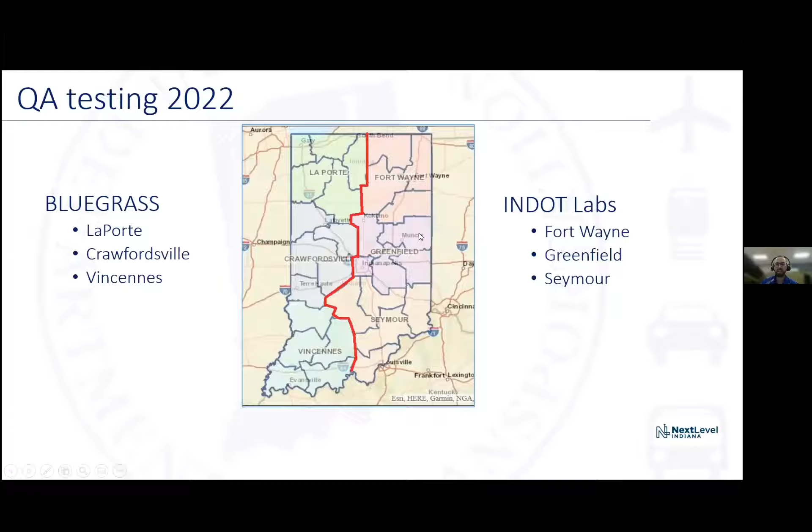So we decided to make a straight line right through the middle. We have Bluegrass doing the left portion of the state, which is LaPorte, Crawfordsville, and Vincennes. And our OMM INDOT Acceptance Center is going to be doing the right side, which includes Fort Wayne, Greenfield, and Seymour. So hopefully you guys have been aware of this by now.

M&T website. So this is just kind of a refresher of things you guys should know or be aware of. We changed our approved products and sources list to qualified products and sources. It's all still the same approval list, just a different title, but those are all on the website. We have our HMA design labs, our ready concrete plants, all our ITMs, and those update pretty frequently. So it's always good to know where those are at and make sure you're looking at the current one.

We also have testing memos, our certified list. This includes CAP, field supervisor, and ICAT. I would say it doesn't hurt to go in here and look at it every now and then to make sure you're actually proficient and make sure everything is updated on this list. And if not, you could always email me or Krista and we could update this list with your appropriate qualifications.

We have our GSB list, which a lot of you guys should be using already with your new DMS for 2022. And we have our data views, which I will talk about a little later. So overview, things we're going to be talking about today include specification updates, our various HMA programs that have been released in the last couple of years, and some of our initiatives like our pilot projects, VRAM, spray paver, etc.

First things first, spec updates. We got our RSPs. These are recurring special provisions, which would be implemented into the 2024 spec book. So the main update we had this year was in 401 R736. So we decided to put in the spec to use RPE as an alternative for joint sealant instead of SS-1h or AE-NT. And in the table, you can see the application rate's a little different.

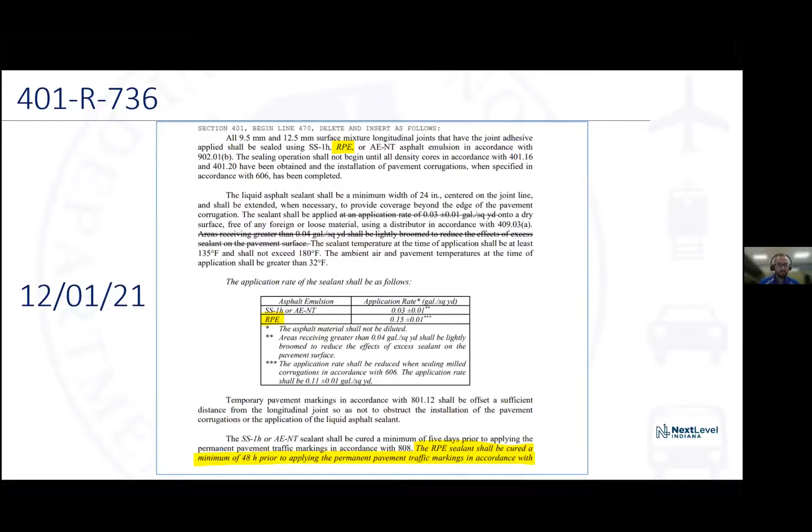Another update we have is about patching material. There's some situations kind of at the end of the year where you might not have hot mix and you just took a core and you need to fill that core hole. So we have a QPL, a qualified products list for rapid setting patch material. And if you go on there, there's a subsection called bridge deck repair material. And there's a list of various concrete materials that can be used to fill up those core holes. You can use anything on that list.

Various states around us, such as Illinois, and I think Kentucky, have been using cold concrete patch materials for core holes, and they haven't had any issues with it. So we decided to go ahead and start doing that too. And this applies for contracts that let after 6/1/2022.

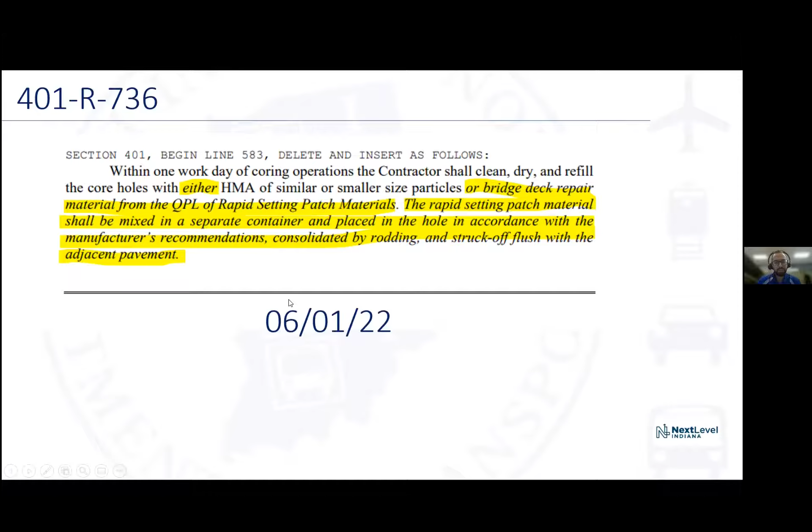ITM updates, like I said, these are all online. They're always good to look at. They update various times throughout the year. There's 4 main ones that we updated. First off was ITM 571. We added the auto extractor as a method for extractions. I think we have about 3 or 4 producers that actually have these machines, so we do that in there for them. ITM 583, which is our certified HMA producer program.

We put a little minor update for binder adjustments for SMA, for JMFs. ITM 587, reducing sample size. We put more guidance on our quartering sample method, which we use for splitting the samples. And ITM 902 for sieve verification, which Matt discussed earlier, just updated the tables below.

So ITM 571, INDOT will be using the auto extractors for 2022. And here's what it looks like in the ITM. It says there's 6 washes and 6 dries for HMA, and SMA uses 8. And we're always going to have the same number of wash as the dry cycles.

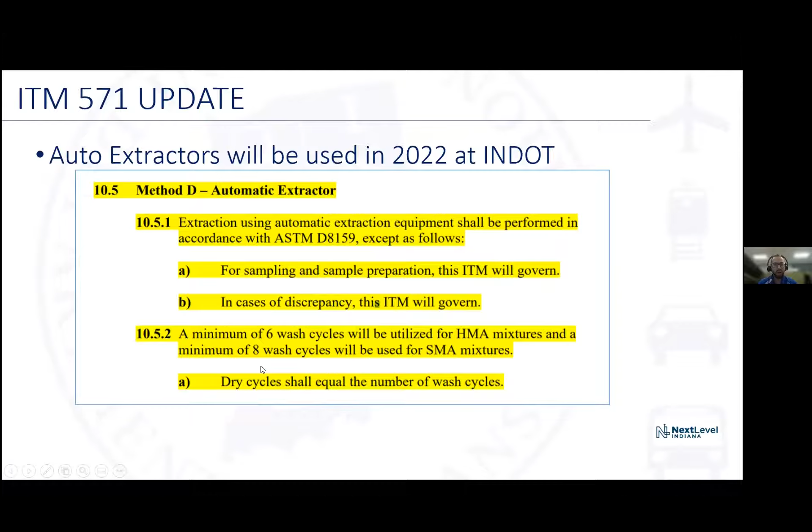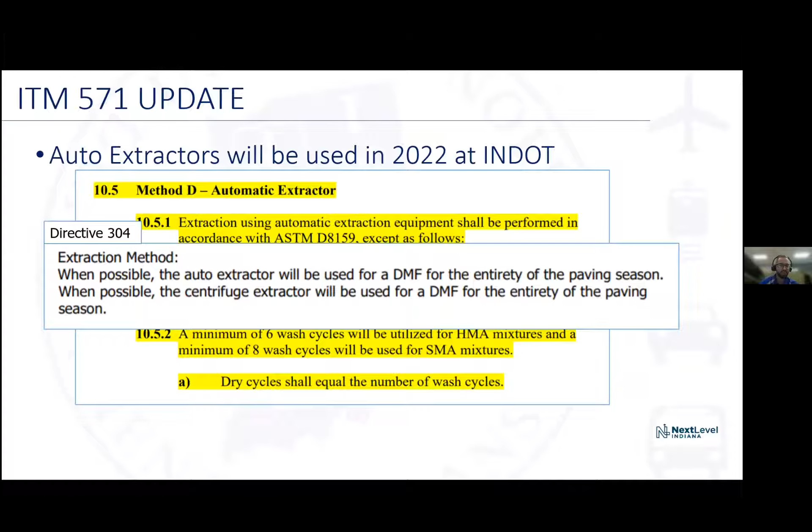But we put this little blurb in Directive 304 saying that whatever method we use for extraction on a DMF will be used throughout the paving season. So we will not be switching between auto extractors and centrifuges. We will use auto extractors for everything in 2022, at least for INDOT.

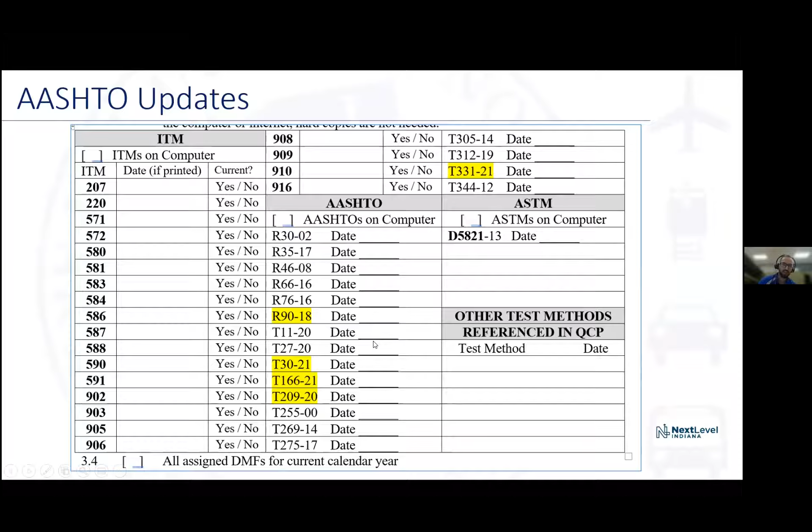AASHTO updates. This is directly out of our HMA audit packet. I kind of highlighted some of the ones that recently changed just to let you guys know for your audits coming up this season, so you have the updated versions. And it's most of the main AASHTOs for asphalt that changed: your gradations, your bulks, your max, your CoreLok. So go ahead and look at those, make sure you got the updated version before the audits and you're aware of the changes that were made.

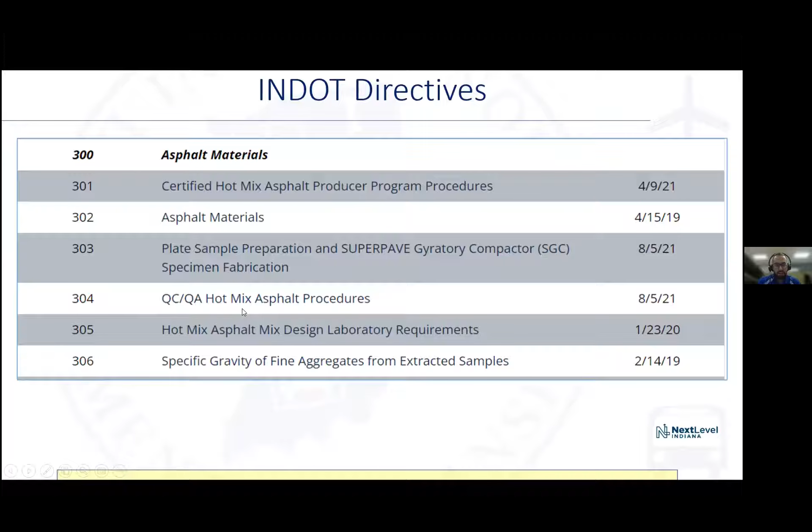Directives, these are also on the website. I showed you Directive 304 earlier. These are internal procedures developed by INDOT. And I think HMA has about 6 of them. And here's those 6. Main one, like I said, is 304 QC/QA hot mix asphalt procedures. And we also did update something else in there, which I'll show right here.

Directive 304, we updated your gyratory specimens. So occasionally you'll make your pills. One pill will be more than 0.02 different from the other pill. Normally we would rerun the sample and see what the values are. Now we're saying that we have this A3 box, and if it's not being used for GSB testing or for an appeal sample, that we could use that sample to make new pills.

Doesn't happen that often though. I think last year we had maybe 12 pills that were more than 0.02 apart. So it's nothing to really worry about, but it's just another alternative we can use to make sure that those pill values are correct.

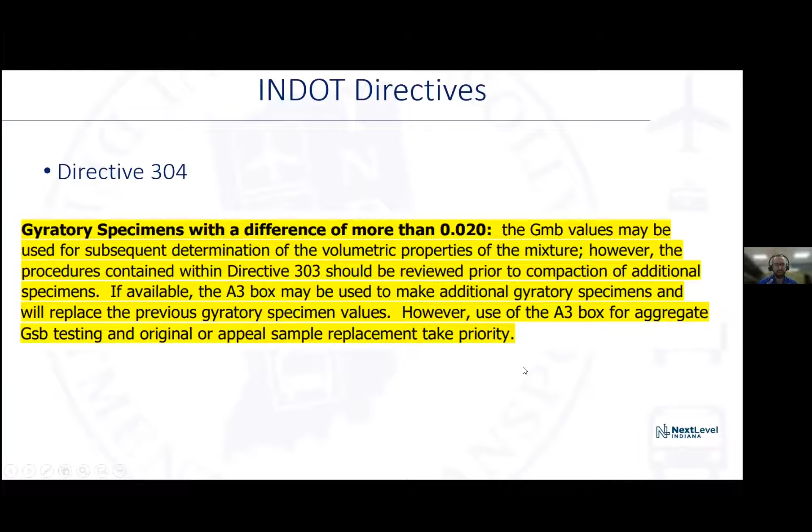So modernizing workflow, this is all about our new programs, our cloud-based systems. We have our DMF entry, we have field assistant, lab testing, and HMA Pay Wizard. So DMF entry is used by you guys, the HMA producers, and our district testing, so INDOT. Lab testing is used by our testing facilities, Bluegrass and INDOT testing labs. This is where they put the data in before it goes into Pay Wizard. Field assistant and site manager are all used by our construction folks. And Pay Wizard, again, producers and all INDOT people.

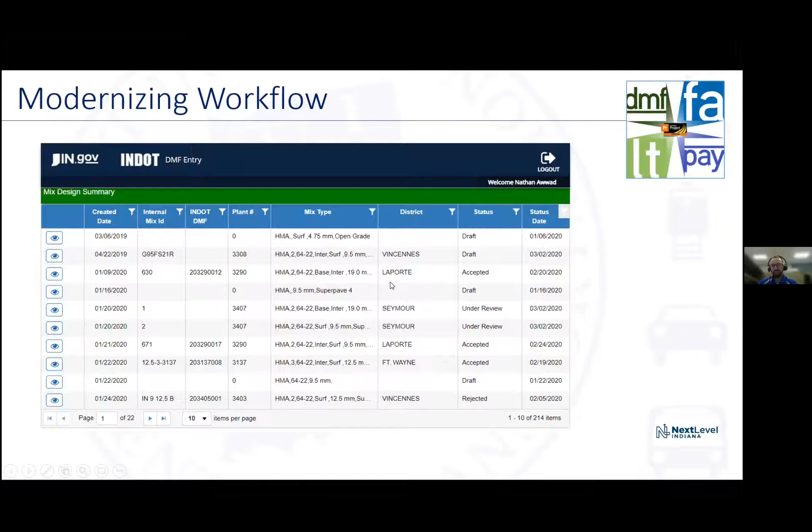So this was a picture of our DMFs. This is just an overview screen. It shows you when it's created. You can see the status of it, whether it's accepted, approved, the type of mix, district. This did just change a little with the new DMF entry update on Saturday. So it might look a little different, but it's generally the same thing. This is the actual DMF. You got your aggregates, your GSB values, binder, etc.

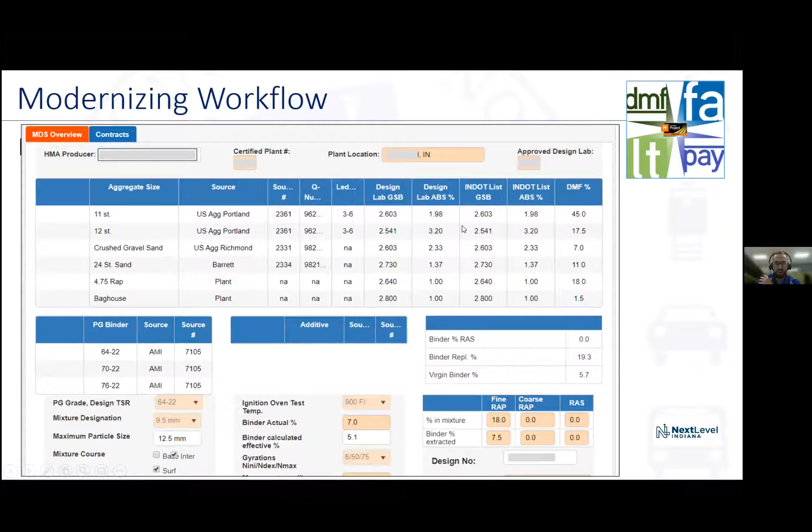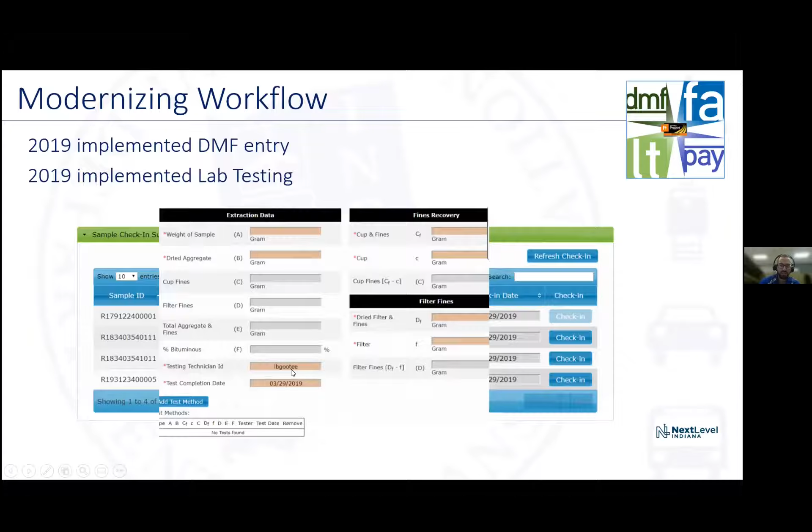So DMF entry was implemented in 2019 along with the lab testing. This is a picture of lab testing. This is their check-in screen. They could see the R number, where the district is, and the DMF number, and they check it in showing that we have the sample in our lab to start testing, just to show ownership of the sample. And then this is a picture of the extraction tab. So they would see this and they'd fill out all these reddish color cells, and everything else will auto calculate.

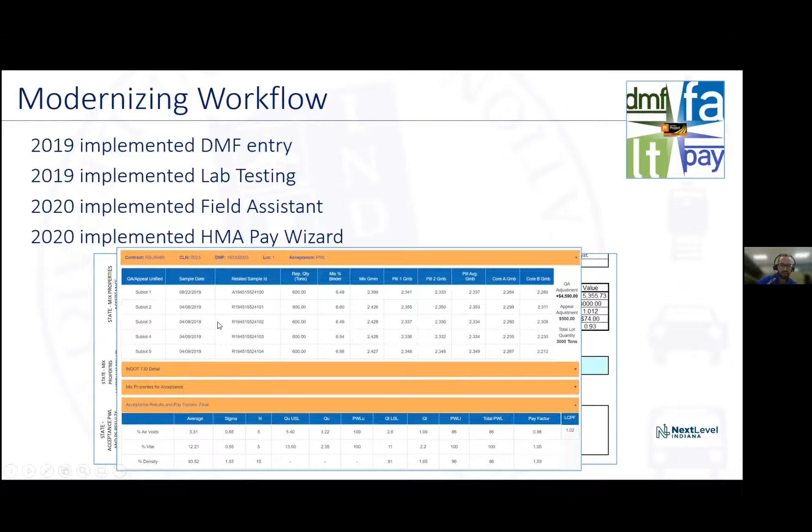And we also did Pay Wizard. So we had these Excel spreadsheets, and they were kind of clunky sending the data back and forth, and it wasn't fast or real time. So we decided to do Pay Wizard. So most of you guys have seen this by now. It shows you all your sublots, and then further below you can see your pay factors.

So DMF entry was only for HMA and open graded, but like I said, there was just an update, which I'll talk about in a minute right here. So this update just went live on Saturday. So I'm pretty sure most of you guys have seen it by now. If not, I'd go in there and definitely look at it. Now, one of the big updates is it'll accept SMA. This includes JMFs and DMFs. And it's also going to act as a filing cabinet for various mix types, all our recycling, FDR, CIR, CCPR, and you can even assign them to contracts in DMF entry.

I will say this system just came out Saturday, and the team did a lot of testing, but there's still always bugs you see after it's been released. There's just certain things you don't think to check, or just something happens that you're not aware of. So if you see any issues, contact CM support at indot.in.gov, and then contact me and Nathan, or copy us in that email, so we could see the solutions to the problems, because everyone else is going to be seeing the same issue, and we'll have the same problems to resolve.

So a couple of issues that they had were like the print view. I think last time with DMF entry, you had to go to the browser to print. Now there's like a menu button on the left, 3 lines, you would hit that and then hit print, and then it'll print your whole DMF on one screen. And another issue that we had is about RAS. If you put 0% RAS, it's saying that it's outside the spec limit, which isn't possible. But I know Kenny just released an update last night, and I'm not sure if that was part of the things that got fixed. But like I said, if there's issues, just let us know and we'll get those fixed right away, because you're not the only one having these issues.

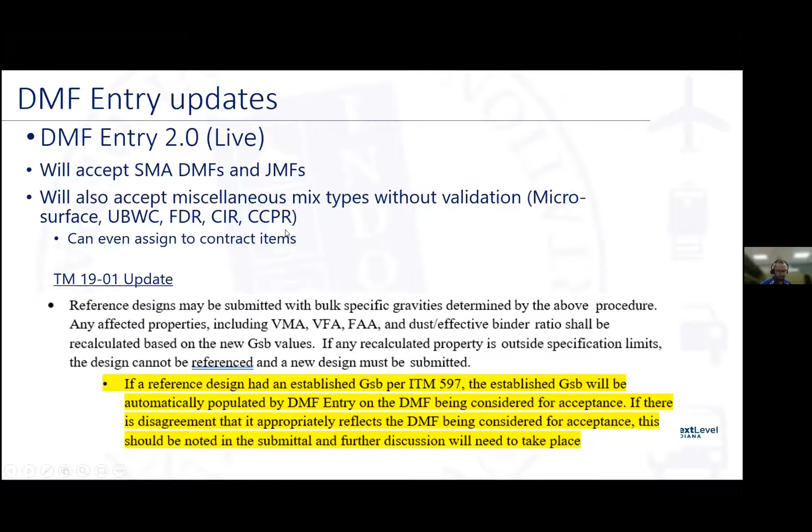So another update we have is testing memo 1901. So pretty much this is saying if you had a GSB change in 2021, I sent you an email saying it changed, and that DMF value you used last year will carry over into the new DMF this upcoming season. And now with DMF entry, the whole GSB thing is all automatic. So you won't get any emails or notifications from me. You'll get notifications in ITAP saying your GSB's changed, and you'll be able to see all your test results on DMF entry or Pay Wizard. So don't worry about my emails, but you can always contact me if you want to verify the GSB, etc. But you should be able to see that.

So Pay Wizard updates, this is a feature enhancement 2023. We're still trying to work on improving our systems. So by 2023, we're hoping to have open grade and SMA in there. And then we can finally get rid of all our acceptance lab workbooks, the Excel sheets.

R numbers. The last couple of years, we've been saying these are super important. You need these to enter your QC data. If you don't have your R numbers right away, contact the districts or contact someone from materials and tests, and we could get you those R numbers.

And then some things to let us know: if you have a contract that needs to be rolled back, especially at the end of the season. Maybe it was supposed to be PWL, needs to go to volumetric, let us know. We could easily switch those. Or if something's stuck, and by stuck, I mean, say you have a PWL contract with 5 sublots, but you're not seeing your pay factors. That is something that we could easily fix. We just have to go in the system, but if we don't know about it, we can't fix it.

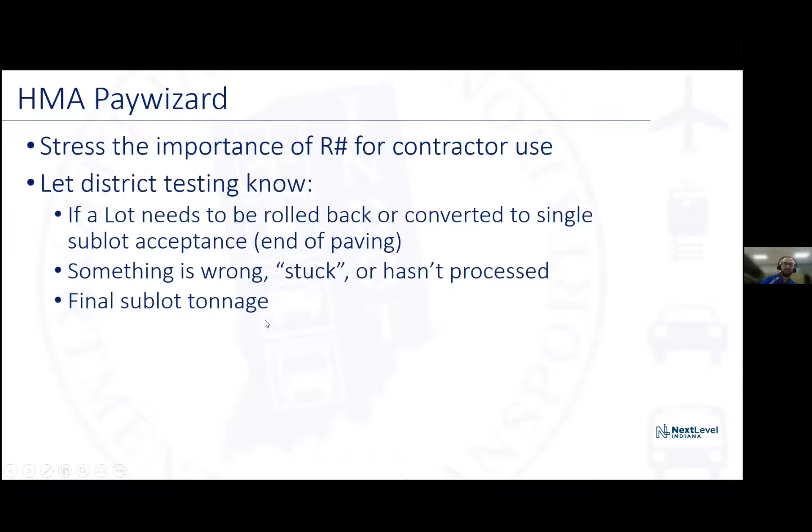Final tonnages, that's another thing at the end of the season. It usually shows 600 or 1,000, but we know that's not right. So when you get those final numbers, let the districts know so they could get those updated.

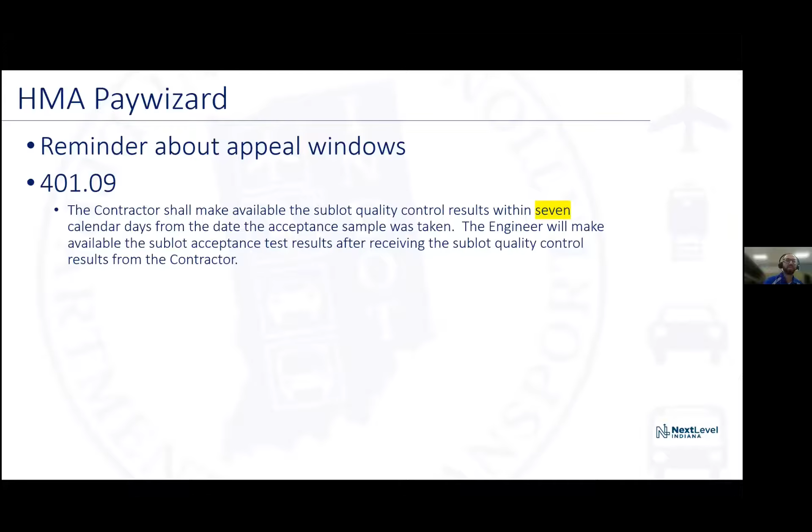Appeal windows. So we've had this in the spec for a while, 401.09, saying that there's 7 days to put the QC data into, I guess now, Pay Wizard. This is important because we have this tool now to copy QA to QC. And what that means is if INDOT has test results and it's not getting put into Pay Wizard because there's no QC data, we could go in the system and use our data for QC, which will avoid your appeal out. So here's just a couple examples.

These are from 211. They're way past 7 days. So we would go in here and copy our results to QC just to get those results to display. We don't want to take months or weeks to go through the whole appeal process and have test results just sitting there where no one can see them. So we need to make sure we're meeting our 7-day time window.

So the real benefits, like I said, of all these systems is just data. It's real time stuff that we never had access to. We're not waiting around for emails for test results. It's all there. And like I said earlier, we had some data views on our website. The only one we have right now is our pay factors and comparisons. So if you click on that, you'll see this. The first screen is your pay factors.

You can see by PWL, volumetric. You can see the sample year. It should go back to, I think, 2019, 2020. You can see each pay factor if you want. You can see what air voids looks like for volumetric contracts only. And then it'll break it down here by district. And it'll show you the average pay factor and how many samples they had. And I will say there's a date over here. I think that we found out sometimes this data is like a week or 2 behind. So just keep an eye on that too.

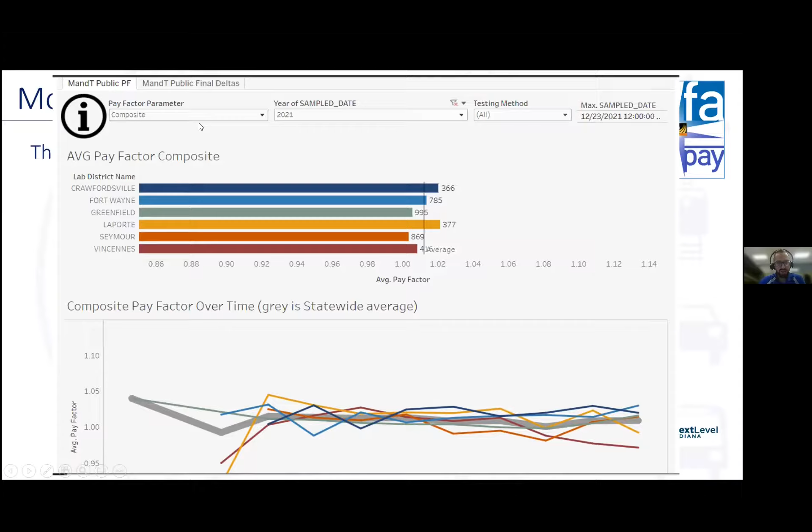And there's also a line graph to see by month. So like at this yellow line here, you'll see there's a big drop down because it's probably in March and there's only 1 sample. So you've got to keep in mind the number of samples for that particular month too. And then we have our Delta screen. It looks exactly like this, but it's just obviously comparing your QC and QA results, which a lot of people like to see.

Densities, we always like to show densities over the last 5 years to see how it was before when we had S4 and how it is now, how it's improved with S5. And last season we got an average of 94.75% density. So that's what we like to see.

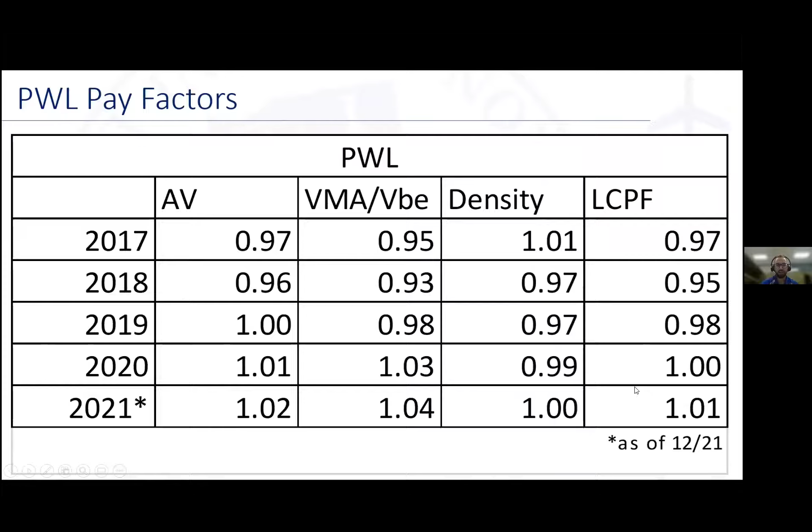Pay factors. Again, we like to show the last 5 years. 2021, this was as of December. We were averaging 1.01 for lot composite pay factor statewide for PWL, which is good. And volumetric, last season we were averaging 1.02.

All right, our HMA initiatives, like I said, this includes our pilot projects. We have a strategic steering committee, I'll just call it SSC. They have been working with us on getting these various projects implemented throughout the state consistently and coming up with the basis of use with us.

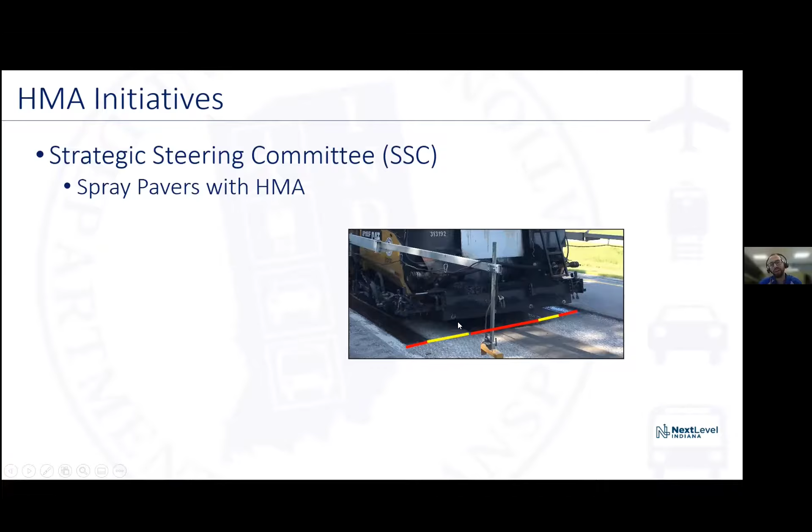So first one's spray pavers. So here's a little picture of a spray paver. All these machines are different, but for this particular one, there's 2 different spray nozzles. The first one is right here. It hits all the stuff in red, and you'll see it leaves spaces between the wheel paths because there's another spray bar behind the wheels that covers the wheel paths, so you're not getting any tracking going at all.

So here's our various RSPs. We got one for HMA, one for SMA. HMA is 401-R-417. So the last couple of years, me and Nathan have been going through trying to find projects ahead of time to use for spray pavers. We always targeted 2 per district, but sometimes they wouldn't get let, for various reasons.

But now we made a design memo so the designers could put spray pavers in a contract. So we came up with the basis of use for large interstates, 4-lane divided highways, HMA or SMA, and we're still trying to target 12 per year. But instead of me and Nathan picking projects, the designers are going to do that. I'm sure they have better visuals on the roads in their districts than we do. So like I said, the target's still the same, nothing to really worry about.

So RSP update, we put an update in here saying that spray pavers can only be used on lanes that are 11 foot or wider. There's some areas where there's 10 foot or 8 foot. It's not even possible to use a spray paver there. So we put this in writing just so people didn't feel like they had to use a spray paver where they obviously couldn't.

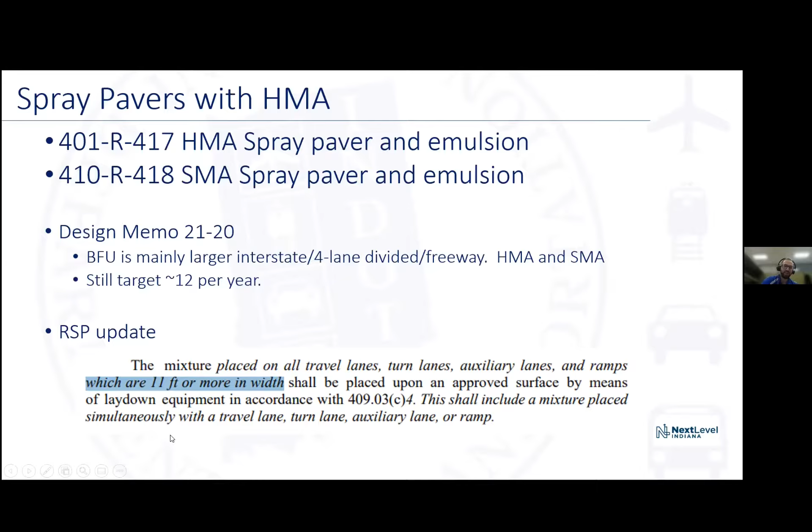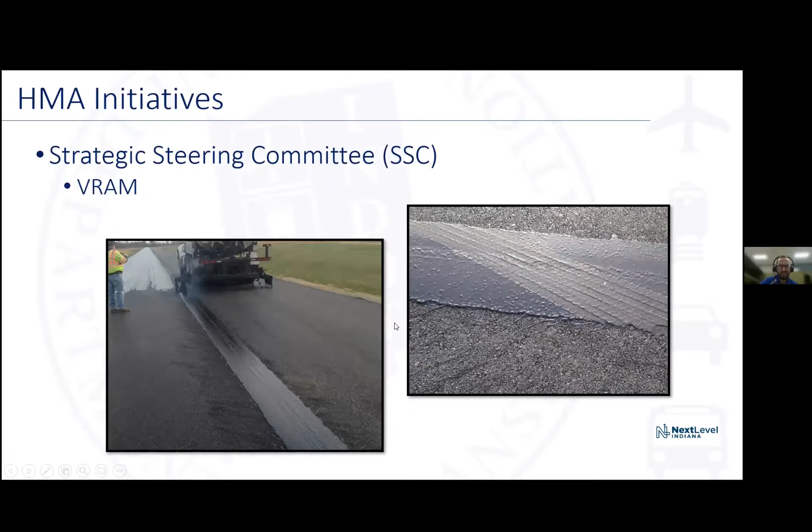Other initiatives, VRAM. So here's a picture of VRAM. I'm sure most of you guys have seen this by now. It's been around for about 3 years, I think, in Indiana. It's just a material, and it wicks up on the next lift to seal up the joint. Basis for use for this is implement approval by M&T. Like I said, we also got 2 different RSPs, one for HMA and one for SMA. HMA is 401-R-750.

So the strategic steering committee decided we want to implement this by 2026 on all Cat 4 roadways. And like I said, in the meantime, M&T Technical Services will be selecting the projects until 2026. Our goal is to implement this next season, 2023. I think we got about 17 projects this upcoming season.

We did just release a new construction memo, 22-01. It came out last month, so hopefully you guys have seen that by now. If not, I would definitely look at that before you have an IRI project. And I would say, if you have any profilographs that need to get verified this season, contact Jim Rowman, or we just have a new hire that's also doing profilographs named John. So either one of those 2, contact them, and we will go ahead and get those verified for you.

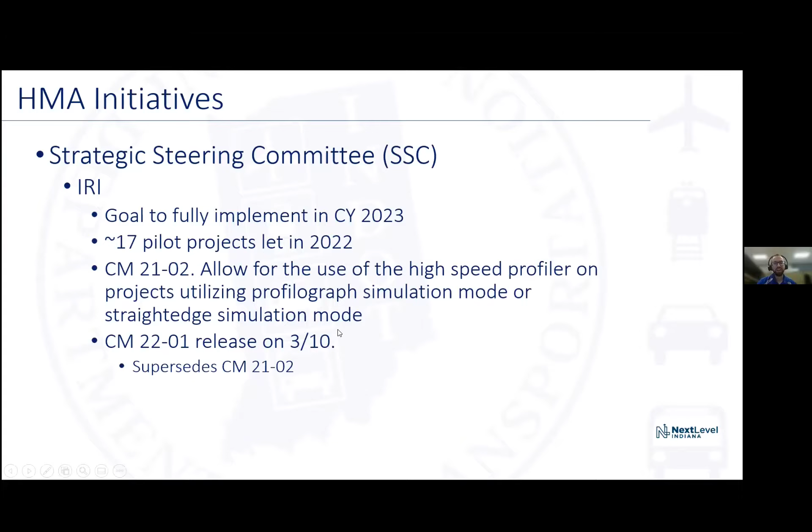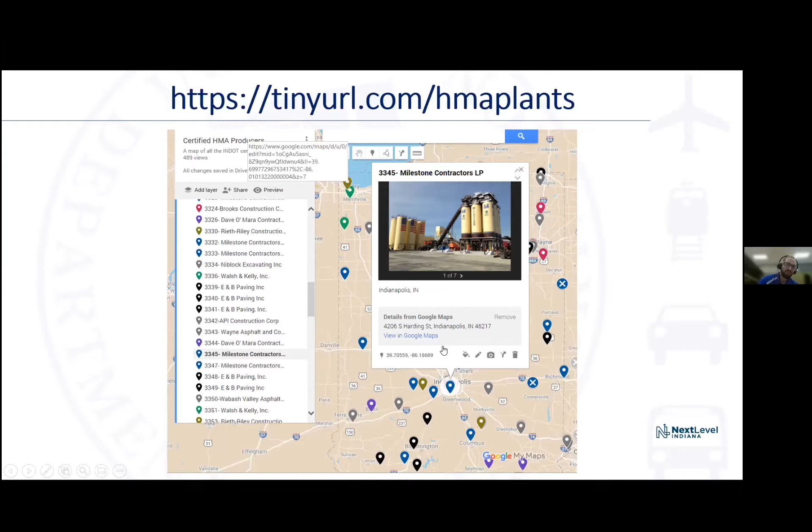Last thing, I don't know if anyone's aware of this. We kind of push it every year. We have a website called tinyurl.com/HMAplants, and it just has locations of each plant by company and pictures. This kind of helps us find the plants, especially when we go to audits, just be aware it's out there. Any questions?

Jason, we did have a question come through, and the question is, for the auto extractors, do sample weights follow AASHTO or ASTM or ITM guidelines? Currently, ITM 571 requires 4,000 grams for a 25 millimeter. However, AASHTO/ASTM allows for 3,000 grams. Most auto extractors have a sample size maximum of 3,500 grams.

That's a good question. Not sure if Nathan has anything to put to the chat. Well, our ITMs govern over AASHTO and ASTM, so if our ITM says 4,000 grams, that's what we'll be using. Hopefully that answers the question. Yeah, thanks, Jason. Maybe we can do a follow-up with Nathan as well, and get a more detailed written response back to that one in the follow-up email.